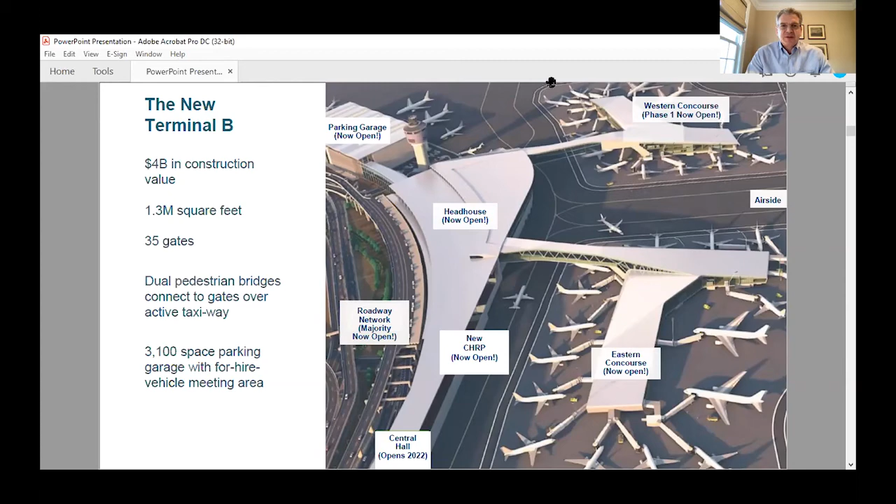I appreciate that. I'd just like to say, to start off, I've been fortunate in my 27-year career to work with two great groups. I worked with Schiphol in the late 90s and learned a lot from the Dutch group about designing JFK Terminal 4. And I'm very fortunate to work side by side with Derek and Stewart for the last 6 years at Vantage and LGP to make this dream come true.

So what I wanted to show you is this image of the old CTB, Central Terminal Building. Notice right off the bat, the area in red, the crescent-shaped building, is directly in the middle of the site. There's a large parking garage on the land side, and then some very skinny, tiny fingers that are piers on the air side. What frustrates everybody about LaGuardia was the decrepit 1964 old building and the inefficiencies on the taxiway and getting out to your runway.

It would have been very easy if we had designed our terminal by taking down this one in its entirety, but we had to maintain the operations. So what you can see in blue are the roadways, the departures and arrivals roadways, that had to be maintained as we did this. The first thing we did was relocate that parking garage to the other side of the air traffic control tower, and we used that footprint to build our new head house.

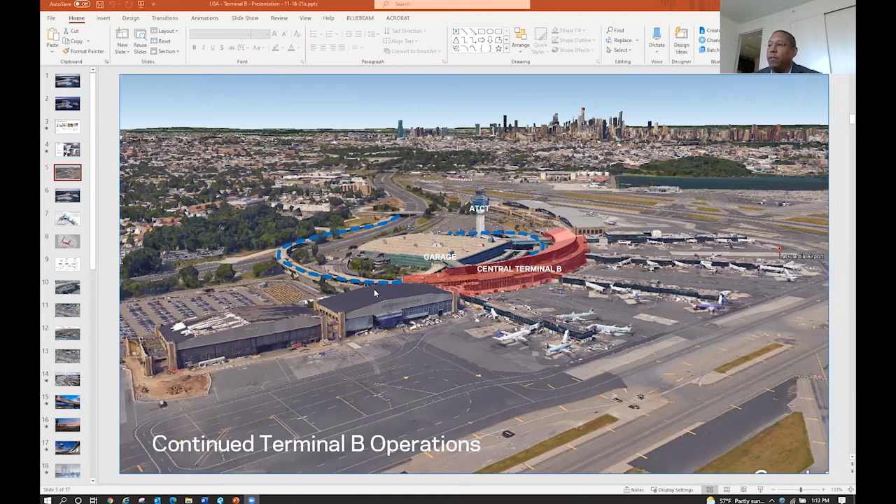If you think about head houses, typically airports have a grand gesture with a swooping roof and then a very small baggage claim area. We didn't do that here. We looked at the site and said, how can we improve this? I want to show you the new terminal design with the old crescent shape in between. To reduce the schedule and reduce the construction cost, we built this head house, which is an ode to an iconic building like Grand Central Station.

The head house houses the departures and arrivals facilities. We created these long pedestrian bridges to go right over the construction and facilitate the construction schedule into these island concourses, so we were able to build the new terminal while operating the old one. That was the circulation of the roads you saw.

How did this really come about? The Port Authority had given us the drawing in blue, which was their indicative design. It was a typical pier shaped concourse. There were inefficiencies in the corners because you can't park aircraft there, and there were separate security screening checkpoints on the outsides. I'll show you where we went with this. When we looked at it, we said it could be built, but we really wanted to think outside the box, and asked how can we address the site and all of these inefficiencies.

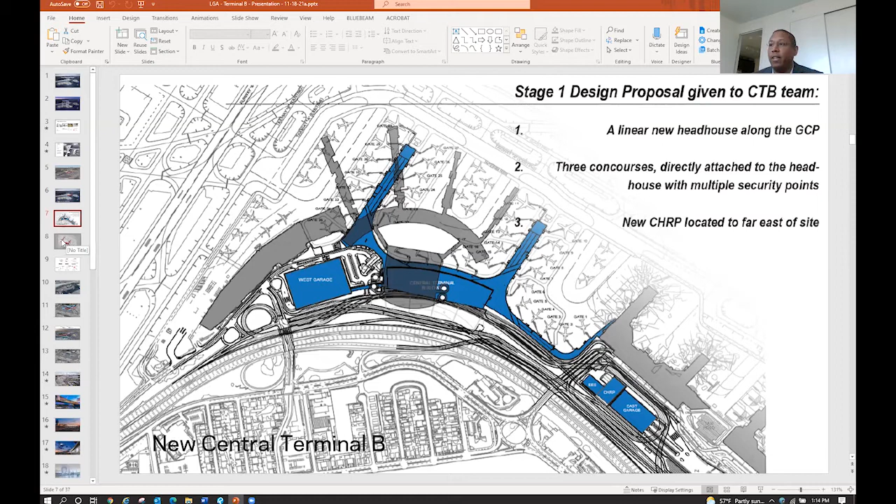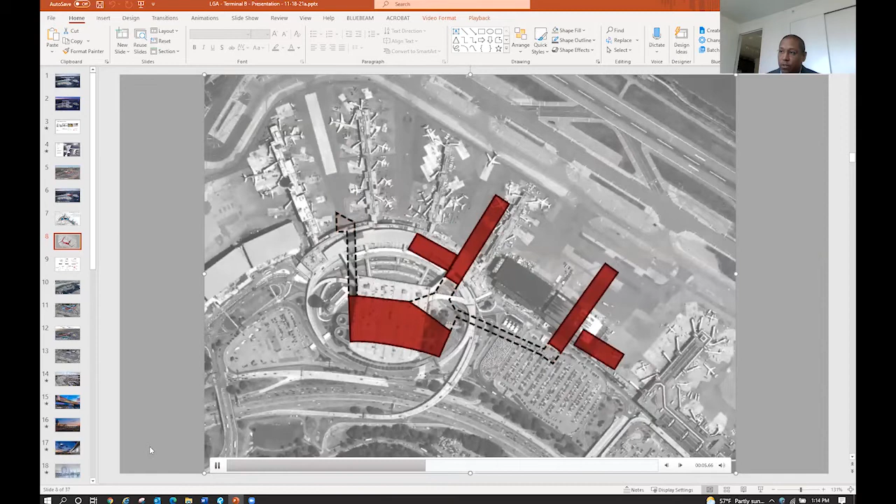I want to play a short video to show how this evolved from the indicative design, pushing the head house further to the south, getting it as close to the Grand Central Parkway as possible so we could maximize the airside. This meant introducing taxiways so that any aircraft can leave from its contact gate with multiple directions to reach the taxi lanes and runways, making a very efficient airside and allowing aircraft movement to happen much more easily. It facilitated the construction and created this sculptural, iconic terminal.

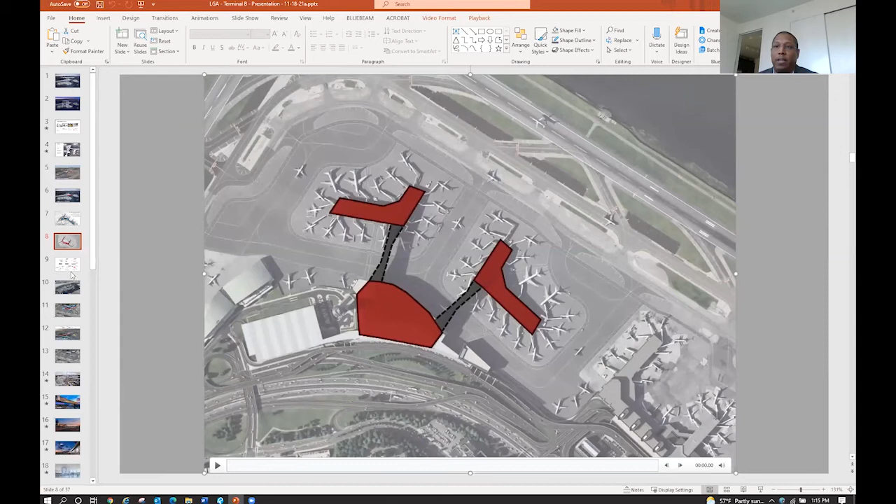Inside the building, as I mentioned, we relocated the two security screening checkpoints into a centralized, flexible space. We pushed the head house forward and maximized the site, allowing for movement around the airside. Hopefully you can see my mouse going around. Then we shifted the entire building over after relocating the parking garage that Stewart mentioned, to really maximize the site. There were two options to get to the concourse.

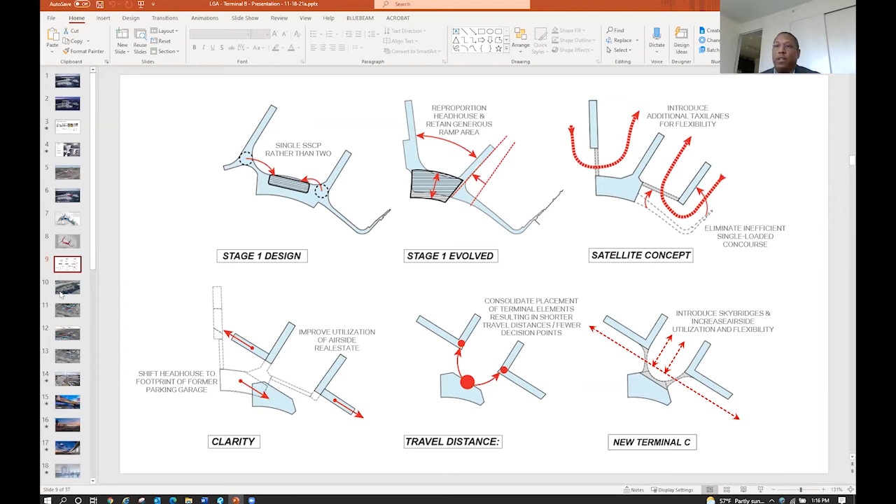One would be underground, given our water table is 7 feet, but that wasn't really feasible. So we went with pedestrian bridges that went right over the construction and facilitated this new design. These bridges, my favorite place in the building, actually have clearance for group 3 and potentially group 4 aircraft to fit underneath. They're about 60 feet up in the air and 450 feet long, and this really facilitated the design and construction.

Looking at the construction phasing, we started with the Island Concourse B, the East Concourse, which opened in late 2018, with the head house pushed to the front. You can see the existing CTB, and in this particular case the Western Concourse is partially open, with the two piers for C and D currently online.

Looking at the scale, you can see the old concourses were 8-foot tall, squat little piers designed for propeller aircraft in the 60s. You can see how much more generous the new size is — those piers were basically about 65 feet wide, while our concourse is about 124 feet wide. So much more generous.

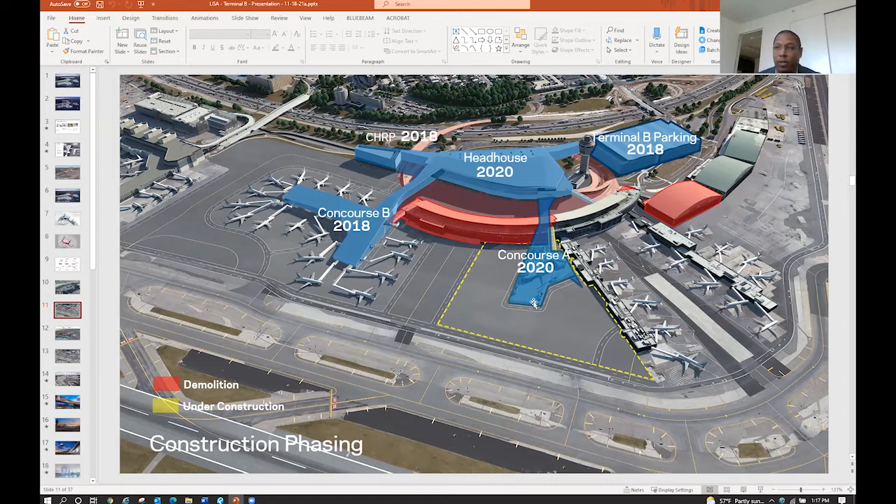As you can see in this timeline of the finished product, the green was operational in '18 — Concourse B. The Eastern Concourse and pedestrian bridge are currently under construction and should come online about December of this year. The head house is now operational, and I think we're 80% complete in construction.

What you see here in blue is our central heating and refrigeration plant — all of our critical infrastructure is built here to facilitate the power and needs of the terminal. Above it is what we call Central Hall West. The idea of this Central Hall is to eventually link Terminal C and B together so we have one unified airport. If you think about it, this is the first airport in the country to undergo a complete redesign in the last 40 years, so it's remarkable that we're able to do this.

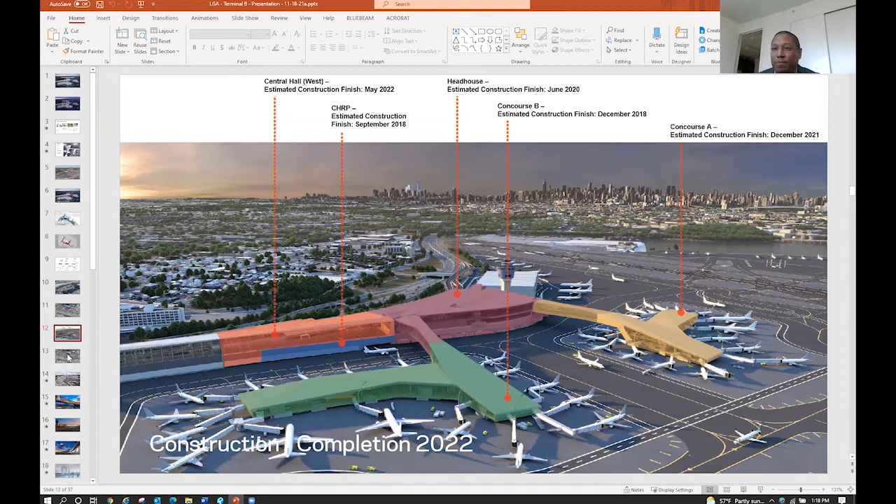Delta Terminal C is a separate presentation happening to the left over here, so you see the finished product. I wanted to show you a little of the construction — two construction photos — because what you can really appreciate here is the Grand Central Parkway on the right side of the screen, and how much we pushed the terminal to the south to use every square inch of that footprint.

It was a very small laydown area. What you see here are the departures roadways and the terminal. You can imagine how difficult it is to construct while maintaining operations.

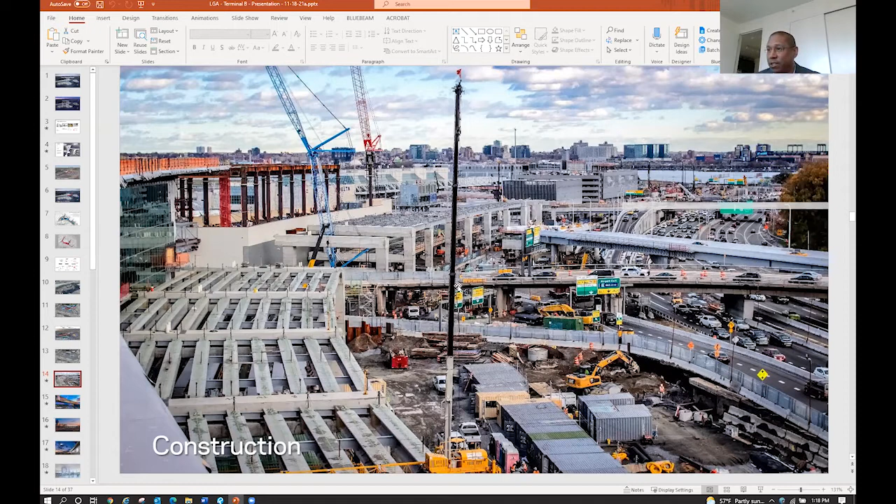You can start to see the roadways of the existing and the new roadways coming into play. This is one of my favorite photos, because it's showing you the existing central terminal behind you, partially demoed, the departures roadway above, the arrivals roadway below, and our new pedestrian bridge. That was really the key to kicking off that design.

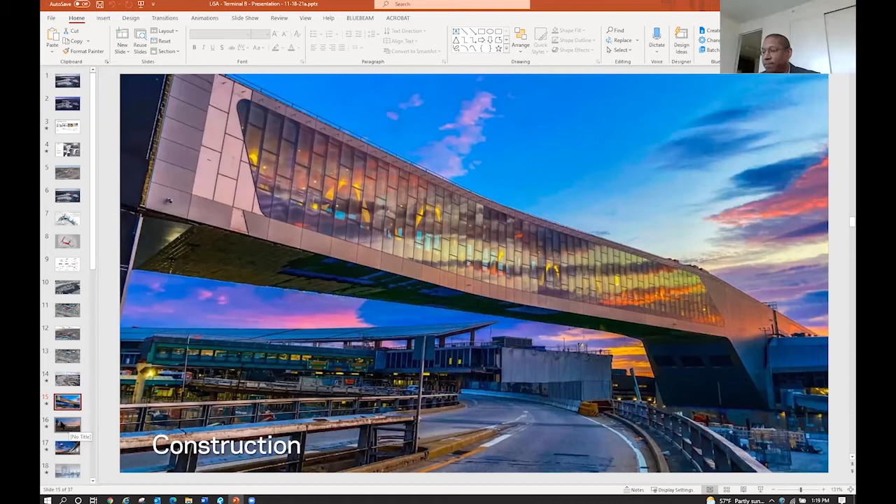Stewart, did I miss anything you want to jump in, or Derek? I think you're hitting it, Paul. Okay, yeah, I got a few points I could add. Sure, go ahead. If you go back to slide 8, Paul. The video—oh sorry, well don't run the video, but I think this is a good talking point slide.

I think what might be important to point out is when we first contemplated bidding on the project and we looked at the port's reference design, there were a number of challenges which we saw, and Paul pointed some of these out. The two security checkpoints, a lot of inside corners, and inside corners are very inefficient for aircraft gating and layout. And to the right of the slide, the lower right, you see a very long, slender, single-loaded pier.

This guy Paul's pointing out—if you look at the building in its mass, there's a lot of surface area to this building, not only from a roofing perspective, but curtain wall, building materials perspective. Even though they brought the building forward closer to the Grand Central Parkway and created some more airside real estate, that real estate really isn't usable by the entire airport facility. It really just adds benefit to the users of Terminal B, but doesn't necessarily improve the flow of aircraft across the facility.

The other challenge we had, you can see here in this picture, the head house actually sits on top of the main arterial road into the airport. And we looked at the port's phasing plans. I don't remember the exact number—I think there were 9 or 10 major phases, but maybe 15 or 16 in totality, with a pretty long schedule. We really struggled with how we were going to build this efficiently and maintain the operation and really sustain an intuitive passenger journey throughout construction.

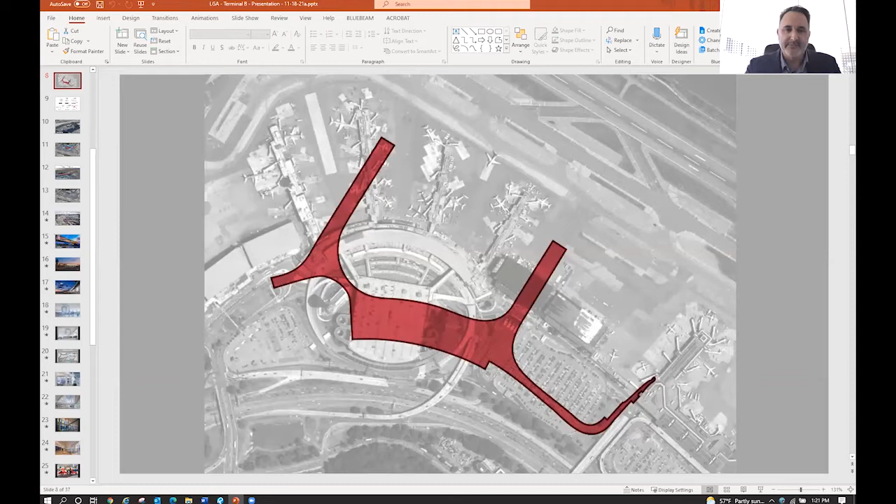So it didn't take us long to embark down our own path and look at alternatives to this design. Maybe if you go to slide 13, Paul.

I think what you can see here in the finished design is we went much more vertical with the building, so our head house is 4 stories. The overall surface area of the facility with the head house, the concourses, and the bridges is much less than what the port's reference design was. We're basically achieving the same program in less space, which meant a more sustainable design, less building materials. In fact, I think we're the first airport to receive—and I thank Paul and the HOK team for this—a LEED Gold standard for an airport.

I think what really also helped with this design, by shrinking our footprint on the site and meeting all the program objectives, is we reduced the phasing down to 5 key phases, which had minimal impact on the existing operation and were easy transition points for our operations and facilities staff. It drove down our cost and drove down our schedule by about a year from the port's reference design. It was really a recipe for the winning bid.

Well, yeah, exactly. I'd love to ask you all a follow-up question, because it seems to me that this process of having all the parties you described, Stewart, really at the table from the beginning, led to a very collaborative, iterative process that yielded a lot of problem solving. You've described that very effectively, I think, to date. But I'm interested in hearing more about that collaboration and how it worked. Was the Port Authority at the table or not? I'm just curious how that all came together and worked.

I'll start it off from a philosophical standpoint, and then kick it over to the rest of the team here. I think it's very important for us that the success of an airport from a passenger perspective is measured by passenger satisfaction. The idea is that if a passenger chooses an activity on their way and their journey through the airport, if they choose a service, or an amenity, something to do, they make a personal choice, then they're probably satisfied because they actually chose something they preferred.

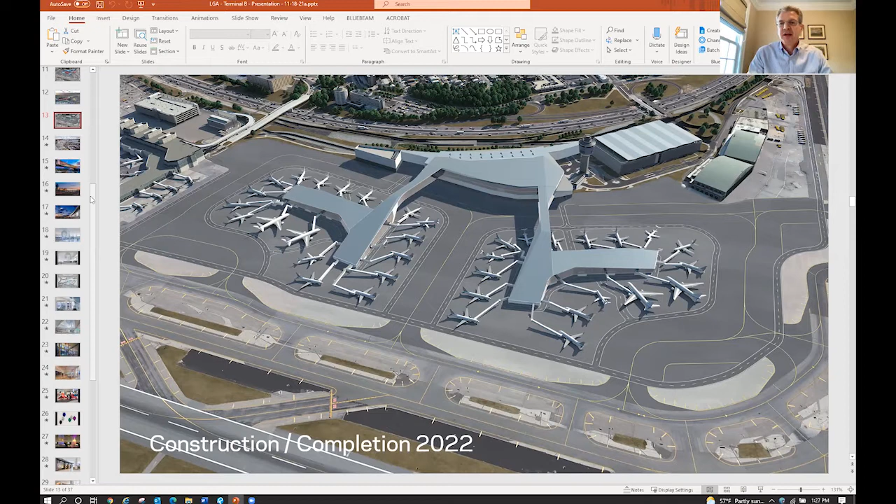They didn't just go to the hold room and sit there waiting for their flight. So it's really about how can we create an experience that impacts people, leaves an impression, and creates personal choice that is meaningful to people.

And with all due respect to Paul and the architecture team, there's building forms and massing and things of that nature, and we show them in photos like we do right now. But most people experience the airport from the back door of a taxi going in the front door. They don't experience it from the other side of the highway, taking a dusk shot.

So how do we achieve a successful architectural outcome, but how do we succeed in the experience with the things that people interact with and touch and feel in the course of their journey? Because that is so impactful to the passengers. And that's everything from restrooms to concessions to check-in kiosks and all the little details. They're just extremely important. So I'll pass over to Derek and Paul to add a bit more color on that.

That's really philosophical, right from the very beginning we knew that mattered. Maybe an interesting point to raise is in the RFP process we went through with the Port Authority, there actually wasn't any requirement for art or sense of place or those sorts of elements.

We made the decision as part of our bid and our team to incorporate that into the design. Some of that was from our Vantage corporate philosophy that it was important to introduce elements of sense of place into the airport facility, really making the airport feel like it belongs to the community or the city, the town, or the country it represents.

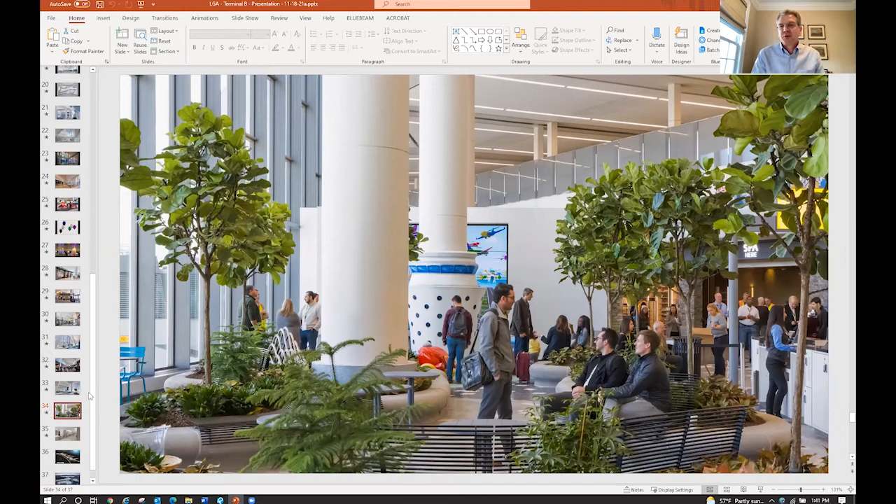So all these are personal choices where people can spend time and dwell. And that has the advantage of doing two things. One, it distributes people throughout the building to things they prefer to do. So if you go to the hold room, there will be fewer people there because they're distributed throughout the facility. It's a more efficient and total use of the facility, which elevates the level of service for everybody, whether you've made a personal choice to do something else or you've gone to the hold room, but now there's less people there with you. So it just improves the level of service for everybody in the facility, and I think that's a key part of the design.

Another aspect of this we haven't talked about yet isn't visual, it's things like natural light and acoustics. We really tried hard to make the facility as quiet as possible. So we've used soft flooring in different places, we've been very careful about announcements, how TVs or music are introduced to the space, and even from an operating perspective, use of radios, to make it quiet.

So if you want a more engaging, active or louder environment, you can go to a restaurant or a bar for that. But if you want a quiet place to rest, you can find that too. And it makes it very soothing and relaxing all day, but especially in the evenings when the light comes down, it feels like a living room. In fact, there are even lamps designed into the hold rooms to make them feel more like a living room space.

And it all improves the relaxation of the passengers. We like to say a relaxed passenger is a satisfied passenger.

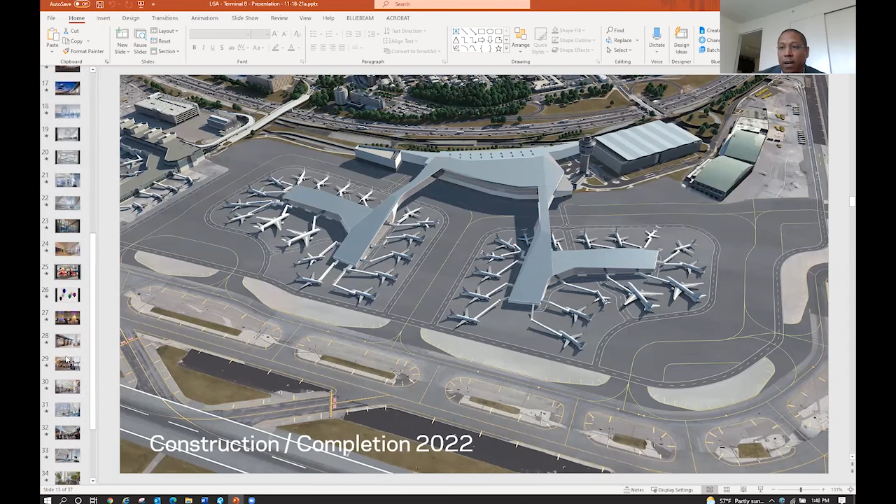I wanted to go back to the hold room, because this is a credit to Derek and Stewart. In terms of infrastructure and providing customer experience and amenities, I point to the hold room because we put power in for all the seats—everybody has a phone, everybody's powering up. But what LGP recognized is we don't want to have another blackout, so they put basically half of the terminal on emergency backup power, so that in a blackout Terminal B can still function, which is a credit to LGP.

I don't know if you want to touch on that, Jared, but yeah, it's a good point. And it's not specific to ART, but certainly resiliency and redundancy is at the forefront of our minds when we plan these things. We think about things like power outages and making sure the facility can still operate, or weather events, making sure we can manage passengers and aircraft.

Speaking to the question about ART and infrastructure, I think LaGuardia has maybe opened some doors, certainly with the Port Authority—they've embraced it at some of their other facilities. Moynihan was mentioned, but we're working on the JFK Terminal 6, and it's a requirement now. We're working with the Port, and we will work with them and others on ART installations there. They've had calls with us about Newark and other stations, so it's become somewhat of a mandate for them too going forward. Thank you.

You anticipated, Derek and Paul, one of the questions that had come in the chat about climate resilience. So thank you for doing that. I'm going to turn to a couple of other questions.

One of the questions is about how the pandemic affected both the construction of the facility, if it had any impact, and also whether there were decisions about interior design that were affected by the pandemic.

I'm happy to start. From a traffic and flow perspective, aviation was hit extremely hard, so we had far less volume during the pandemic. While in some ways that allowed construction to advance a little easier, I'd say it was probably offset by the challenges of the pandemic in terms of supply chains and fabrication shops being shut down. In fact, we concluded the arrivals and departures hall in June of 2020, just a few months after the pandemic began. So we were confronted with finishing the art, with fabrication shops that were shut, and having to get them reopened and get essential work orders.

Some of the artists had to review their art and the installation remotely because they were in Europe and couldn't travel at all. In fact, some of our team had to work with remote security experts to commission some of the security equipment over Zoom. So there were a lot of unique challenges associated with the pandemic and the inability to get experts to come work on the site who were planning to. That was probably more of a challenge than any drop off in traffic created any kind of opportunity. Hopefully that answers the question.

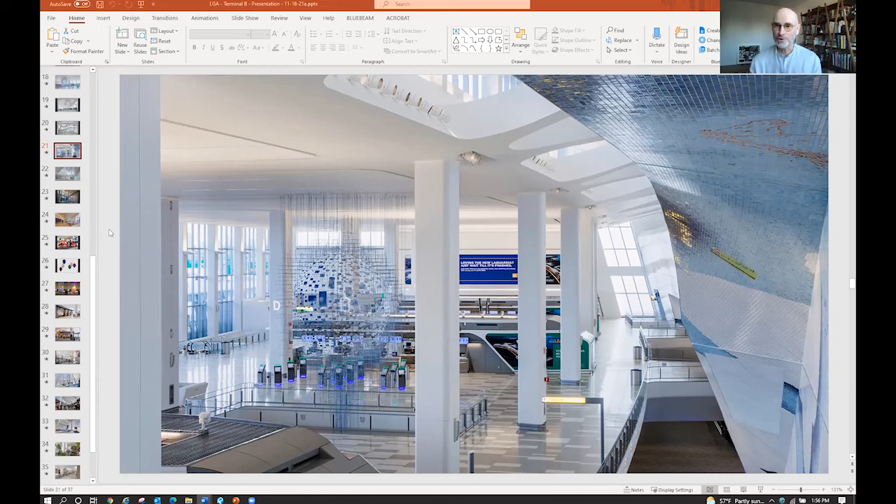So during June, when the head house opened, the New York Times did a fantastic story. And if you remember, everything was closed - all the museums were closed, all the galleries were closed. The headline was: if you're missing culture and you want to see some art, you can go to LaGuardia Airport. And people did.

Someone has asked a question about how much flexibility as designers you have within the regulatory standards set by FAA to make design choices in many features of the airport. They're calling out wayfinding and seating layouts, et cetera. I was curious whether you have thoughts about that.

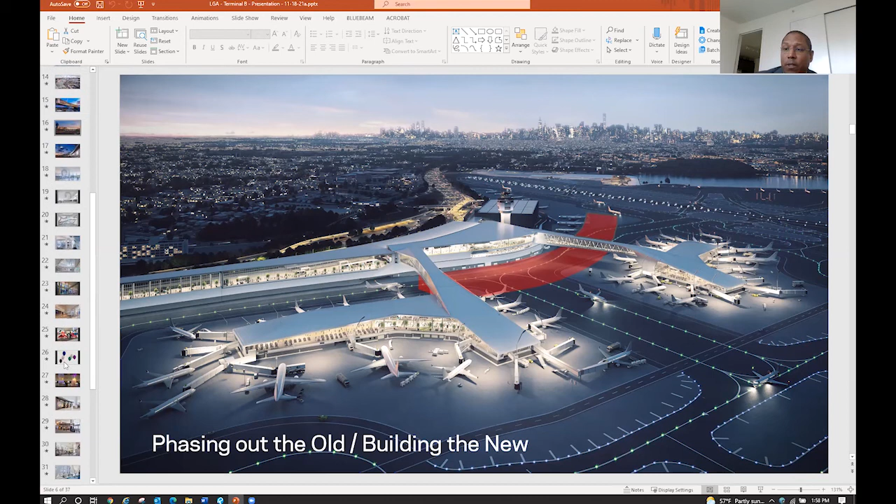But in terms of design inside, we worked with all of the Port Authority's design guidelines. They put together requirements for work and provisions. We followed the standards for throughput, widths, space, hold room sizes, all of that. And we went even further. If you look at the hold room, the typical hold room is set up to hold the aircraft at the gate plus a 2-hour delay, plus amenities. So we've really considered everything in terms of the guidelines in our design. We didn't vary in terms of coming up with our own guidelines.

It's more the sculptural nature and the actual design that we did that with. I'd just add that meeting the regulatory standards or requirements for us is a low bar. It's really going above that and making improvements.